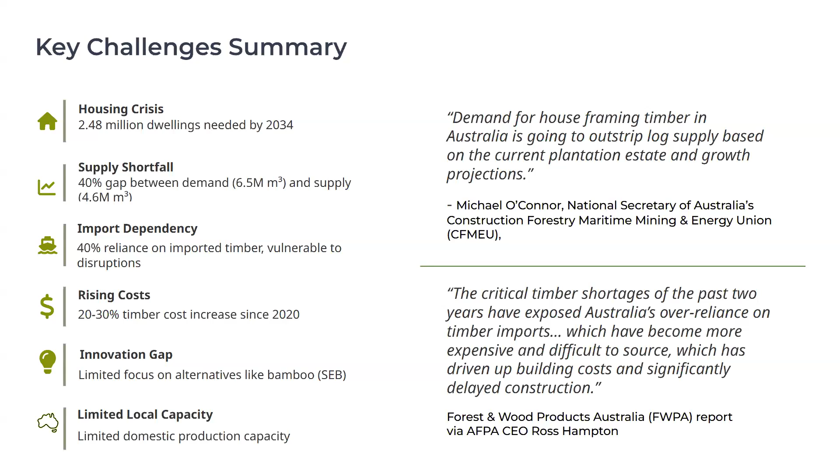On top of this, construction is responsible for over 30% of emissions and generates massive waste, 27 million tonnes a year, with most commercial furniture ending up in landfill. Buildings and infrastructure alone contribute almost a third of Australia's carbon emissions. So if materials are part of the problem, let's see how bamboo can be part of the solution.

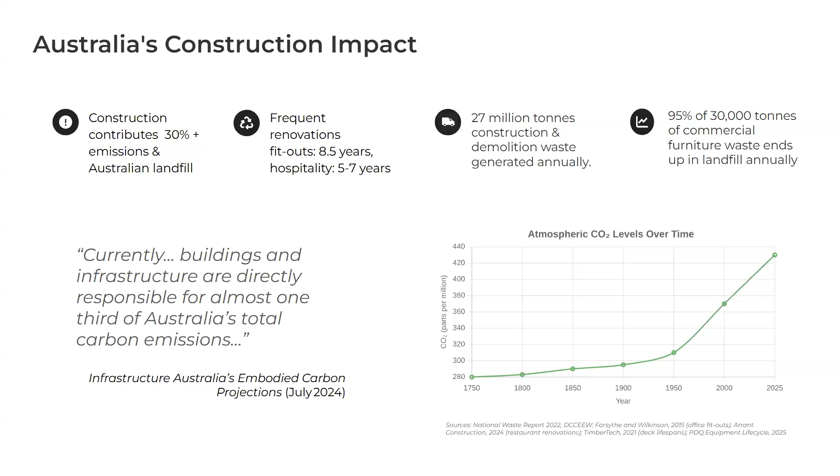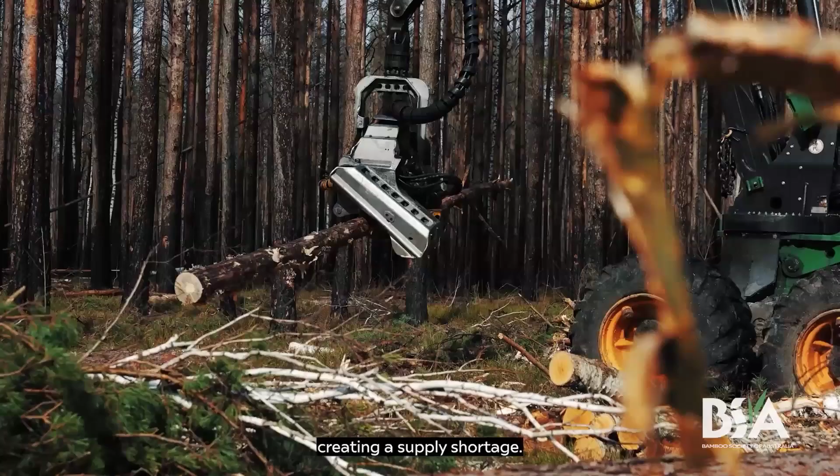Australia's agricultural and building industries face a crossroad. Demand for resources is rising while forests are decreasing, creating a supply shortage. What if the solution has been growing right under our noses for 30 million years?

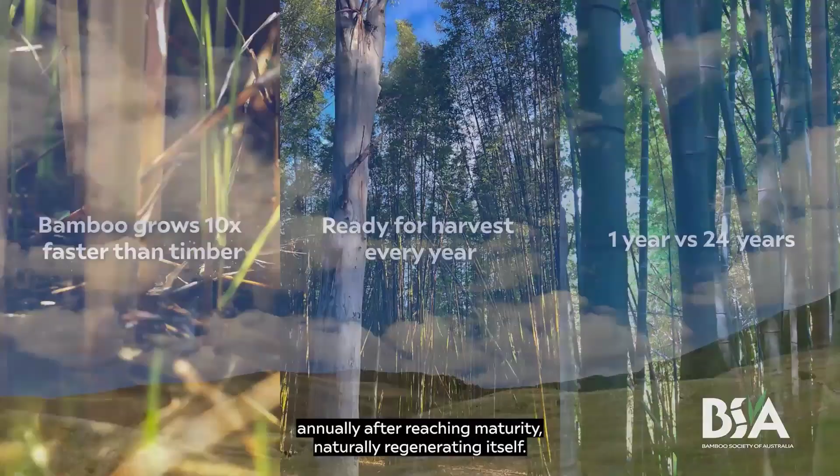Bamboo is a remarkable resource. It grows 10 times faster than timber and can be harvested annually after reaching maturity, naturally regenerating itself. In stark contrast, traditional timber demands decades to mature. With bamboo, there is a sustainable supply year after year.

This remarkable grass maximises production with minimal land use, sparing our native forests from destruction. By yielding more from smaller areas and regenerating, bamboo ensures a sustainable supply while championing environmental conservation. Bamboo plays a vital role in restoring degraded land, purifying water, and capturing carbon at levels surpassing traditional forests. It represents a valuable opportunity for environmental restoration with economic return.

Modern plantations use clumping, non-invasive varieties, harnessing Australia's native bamboo species, complementing Australia's forestry expertise, and creating new opportunities without replacing existing industries. This approach has the potential to provide sustainable energy, create resilient materials, and strengthen rural industries. With careful selection, bamboo farming can integrate into our agricultural system. Together, we can grow Australia's future with bamboo.

That was the start of our opening to the Frontier Summit across 3 cities, having remarkable speakers join us—expertise globally in terms of cross-laminated and engineered timber and bamboo, those delivering that at scale, and some familiar faces you'll see here on screen. We're very grateful for the breadth of speakers we had participate in the summit.

The summit was about exploring the opportunity, as Patty said earlier, the 10-year roadmap, the plan of what we need to do over a 10-year period across a series of phases to actually develop an industry from scratch, from foundations through to market scale, harvesting, commercialisation. We identified these key phases and 16 themes of actions to support the roadmap. The event was framed around exploring opportunities across these themes, and we broke it into 3 different areas for the different cities.

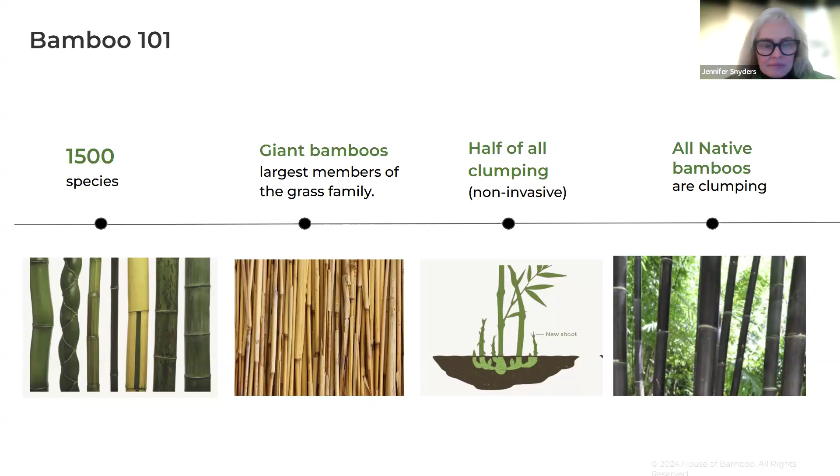That's right. Bamboo's biggest advantage is that it's the fastest growing plant, so it can reach full height in just 6 months. It then spends the next 5 to 7 years strengthening its internal structure, which is when it reaches its optimal strength for construction materials.

Unlike timber, it regenerates annually, harvested above the ground while the root system remains intact. It's not a forestry product, but an agricultural crop, more like a fruit tree, yet it performs like a hardwood. So that raises an important question: where does it fit in our current material framework?

Beyond its growth speed, its environmental impact is just as impressive. It sequesters carbon up to 4 times the rate of some trees and produces 35% more oxygen. Because only mature 5-year-old culms are harvested, about 75% of the plant remains untouched. There's no clear felling, biodiversity is preserved, and because it's cut above the ground, carbon stays stored in the soil. Each year, new shoots generate, creating a truly sustainable annual harvest.

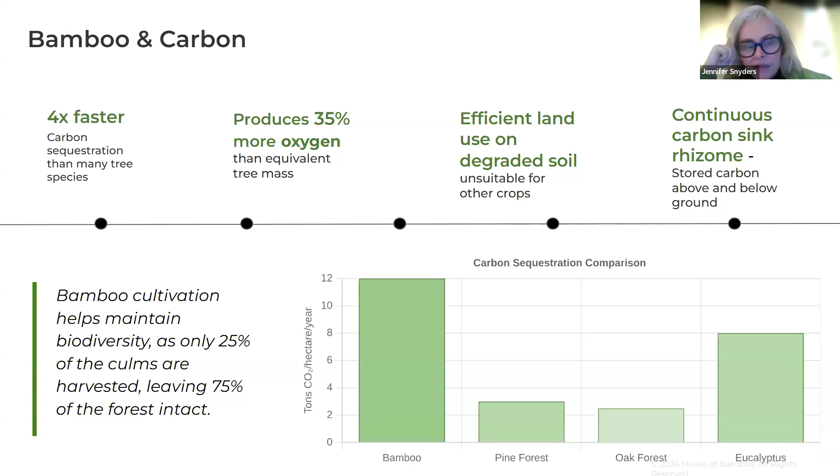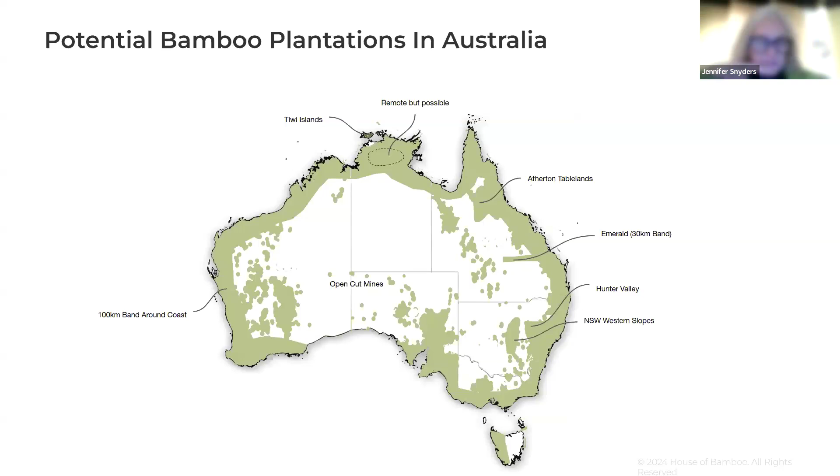If we just planted on 1% of the agricultural land in Australia, we could generate a renewable annual yield of raw material. Because bamboo regenerates each year, this is not a one-off harvest, it's ongoing. The potential is huge, with modelling suggesting up to a 40% reduction in emissions by 2060 if utilised at scale. Which leads us to the final piece: how can all the raw material be used in construction?

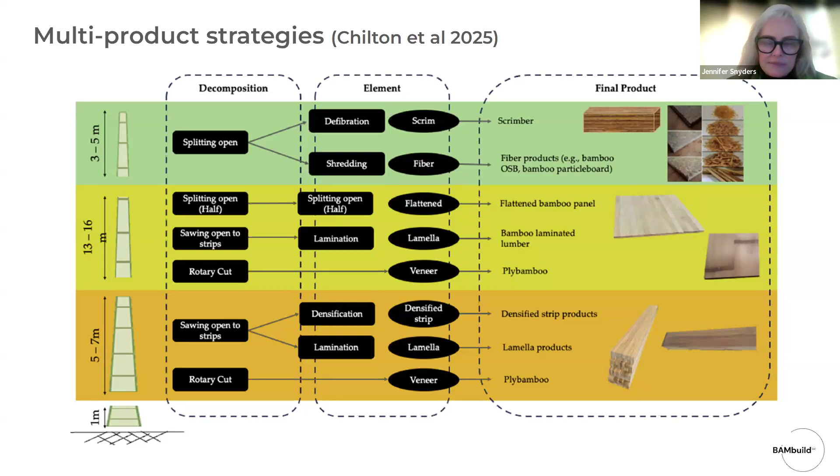With all the potential raw material, you can see from the area how we break up the poles and how we work within the different areas, and what the final product options are with regards to the bamboo. The next step is how it can be transformed into structural materials, and this is where the real impact is.

That leads us well into Sydney, talking to architects and designers about the use cases of applying it into the built environment, which many of MECLA here would be very interested in, and I'm sure there's plenty of those that might have joined us in Sydney for that particular event. We had the opportunity to explore and highlight what has already been built with bamboo and what is possible. We'll share a bit of that.

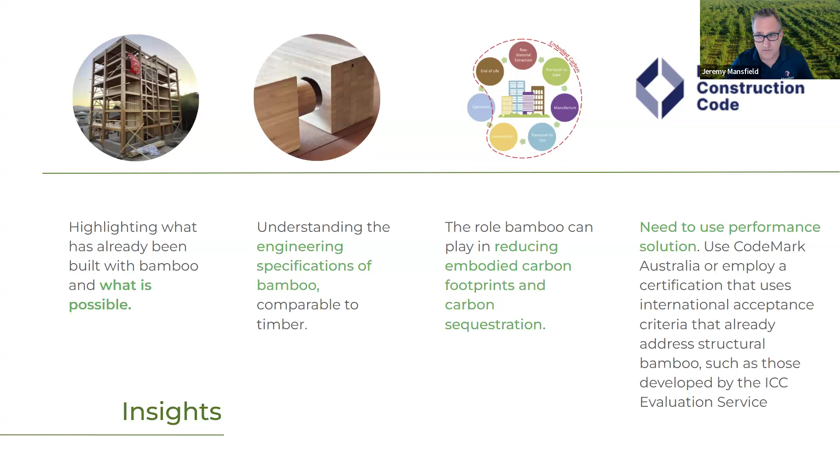Understanding the engineering specifications for bamboo and comparing to timber - we've got some results that will be shared. The role bamboo can play in reducing embodied carbon footprints and carbon sequestration - Isabella will share a bit more about her involvement with that in a minute. We also had a good conversation around the need to use performance solutions in the event that we don't have existing standards, following the pathway led by engineered timber in terms of existing standards and utilising international acceptance criteria to start implementing its utilisation.

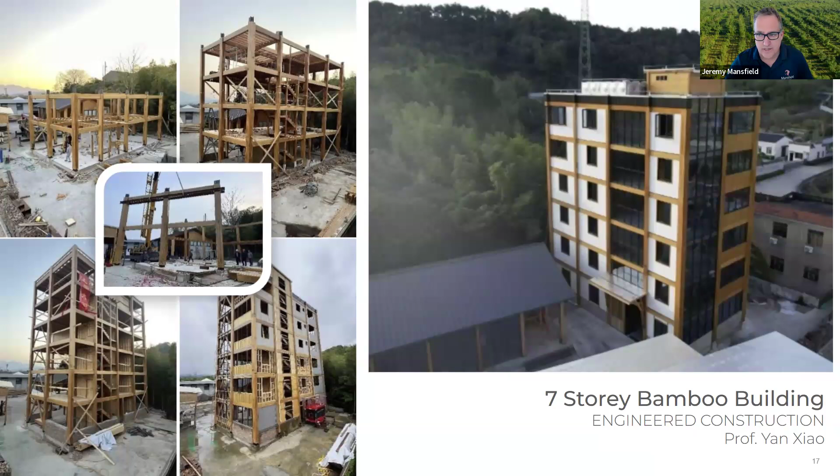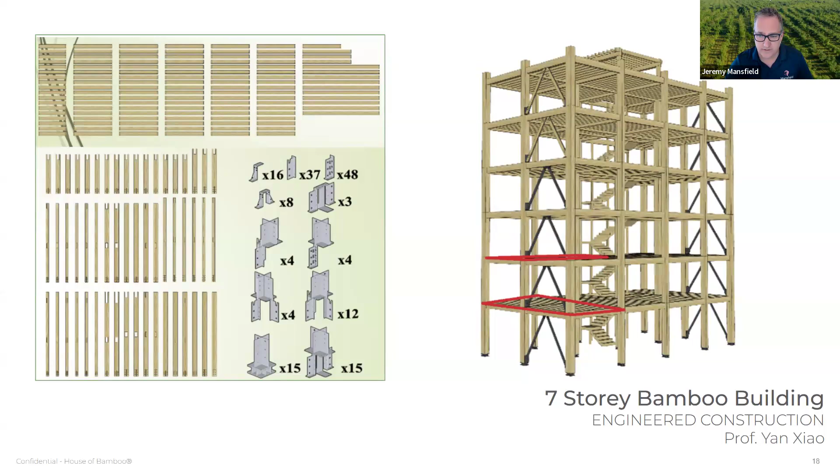We were hugely fortunate to have Professor Xiao join us from China. This is his 7-story bamboo building - yes, I said 7 stories of bamboo. It looks just like a cross-laminated engineered timber building in most parts. In fact, the floor plates on this are actually a cross-laminated bamboo and timber structure flooring system, so they are very close bed partners, timber and bamboo here.

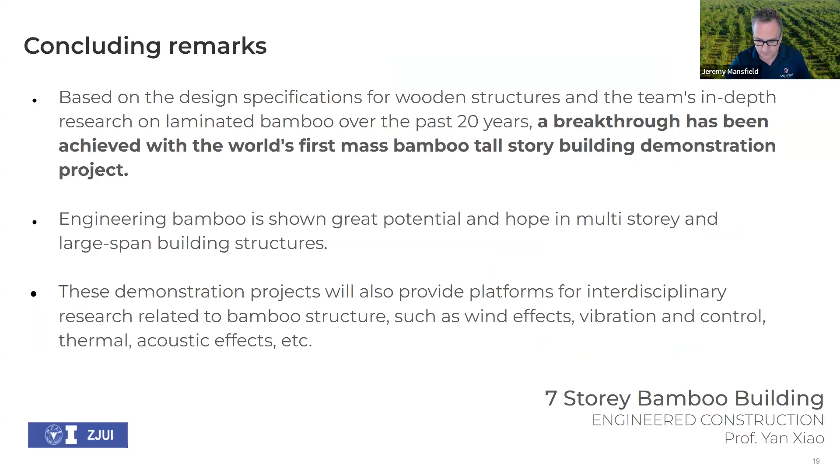We also got him to share some concluding remarks, which we thought were very astute and important to realise - that we have reached a breakthrough moment in seeing it applied in that mass-engineered bamboo demonstration project, sharing its potential and demonstrating its ability to achieve all the other attributes required of any mass-engineered building system. Very fortunate to see that.

And then I said, well, build it and they will come. So I created a showroom, building it with structural bamboo to show what's possible. That actually caught the attention of Professor Mahmood from Deakin University, who offered to test the material, which is very exciting. That was also overseen by Professor Neil Thomas from the UK.

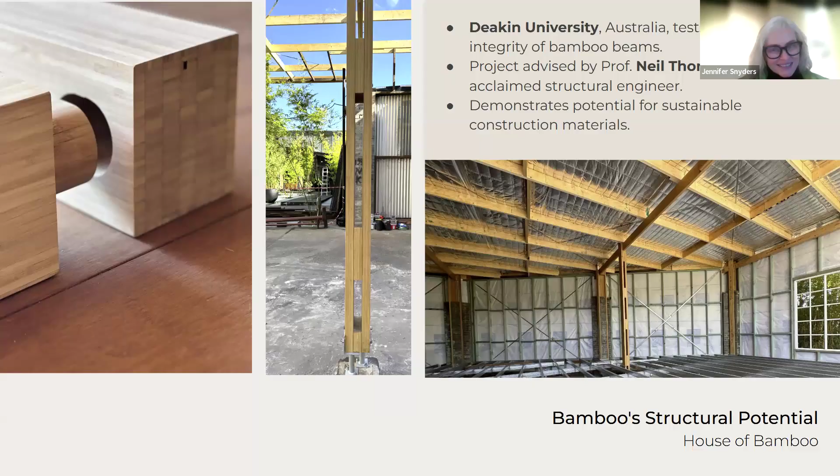They've already tested against ISO standards that exist, so it was really important to get this opportunity to generate Australian results and compare those. The exciting part is that the tests have just been completed 2 weeks ago, so we look forward to providing those results, hopefully mid-September, and then look at how to design to those.

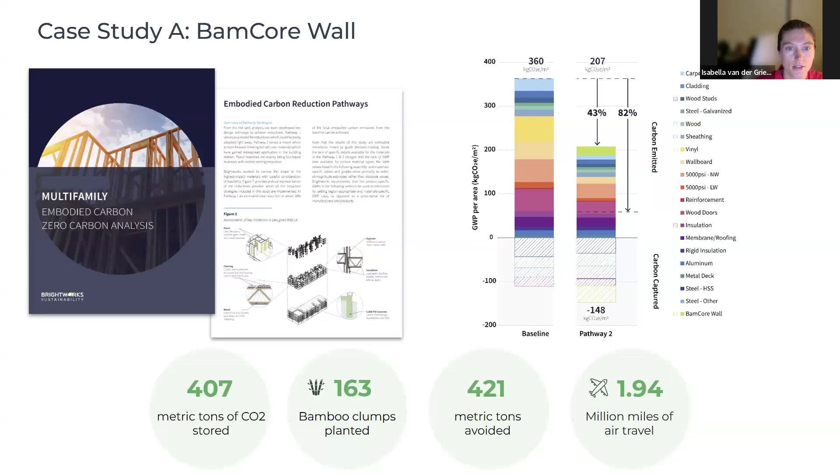But through modeling this bamboo-based system, we saw not only a large decrease in upfront emissions, but also a very significant amount of biogenic carbon stored within this type of building. So it's really exciting to start modeling how bamboo plays a role in decarbonizing a typical structure.

Next slide, please. So when we compare bamboo's embodied carbon to other materials, we can see that bamboo has really large biogenic carbon storage because, as Jennifer was saying, it grows much faster, and with its higher density, it locks away a lot more carbon per cubic meter. But some engineered products can be higher in terms of fossil emissions because they take more processing energy and some adhesives, which can also increase embodied carbon.

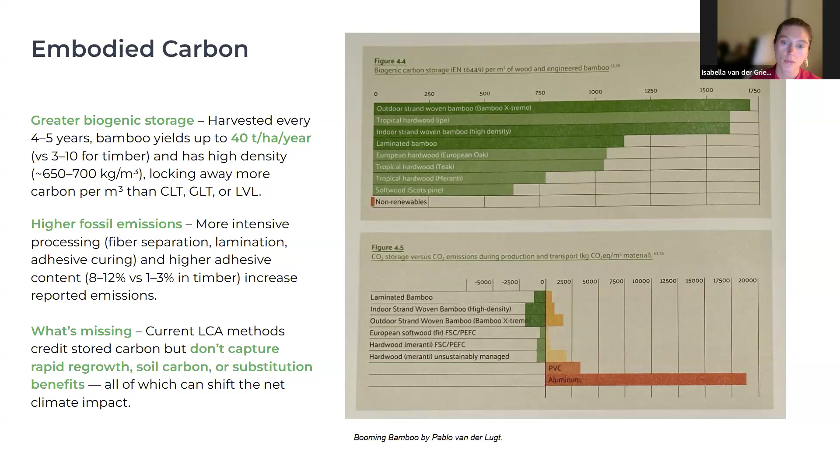But what I really want to speak to is what's missing in our current LCA models: we aren't properly accounting for the rapid regrowth rate and other sustainability benefits of bamboo that Jennifer spoke about earlier. So I'll talk about that in my next slide.

This brings me to some methods in carbon accounting. Today's practice, following current standards—typically ISO and EN standards—is what we call static LCA. For every unit of carbon sequestered during the plant's growth, there is an equal amount of carbon emitted back into the atmosphere at the end of the building's or material's life. So this is essentially assuming carbon neutrality over the full life cycle.

And it's ignoring a really key component here, which is the timing. It's not reflecting the rotation periods of different bio-based materials or their speed of regrowth. That's a key differentiator between materials like timber versus bamboo and straw, which have much faster regrowth rates.

So in order to account for this, dynamic LCAs are becoming more common. The objective there is to consider the timing component. By adding that dimension, we show the fast regrowth rate that bamboo has. That regrowth rate of 4 to 5 years means we can achieve a net cooling impact much faster than with other carbon-emitting materials or longer-harvesting timbers. This is really important when we're talking about meeting our climate goals and the urgency around that timing component.

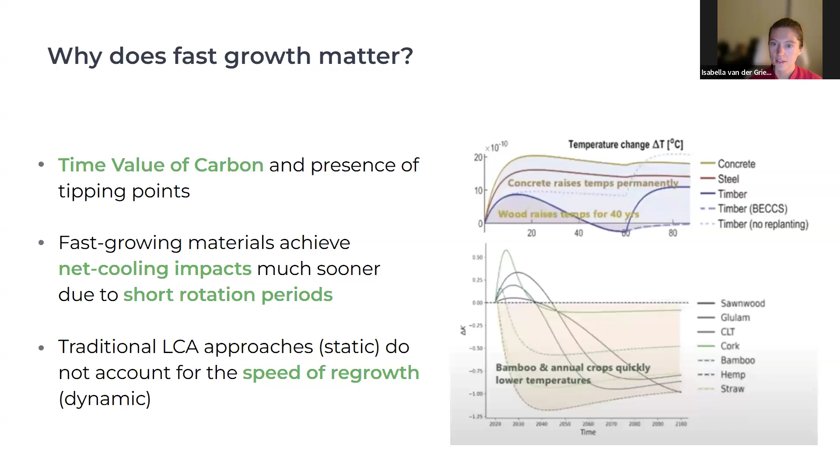Yeah, so I'll hand it back over.

You're on mute. I'm near the airport, trying to save you the airplane noises.

Here's some examples of engineered bamboo applications here in Australia. This is all about curves—engineered bamboo in the Marvel Stadium.

This was completed last year. All the components were about 167 battens, all prefabricated and brought to site, and it was a seamless installation. And doesn't it look beautiful? Bamboo and curves. Next one.

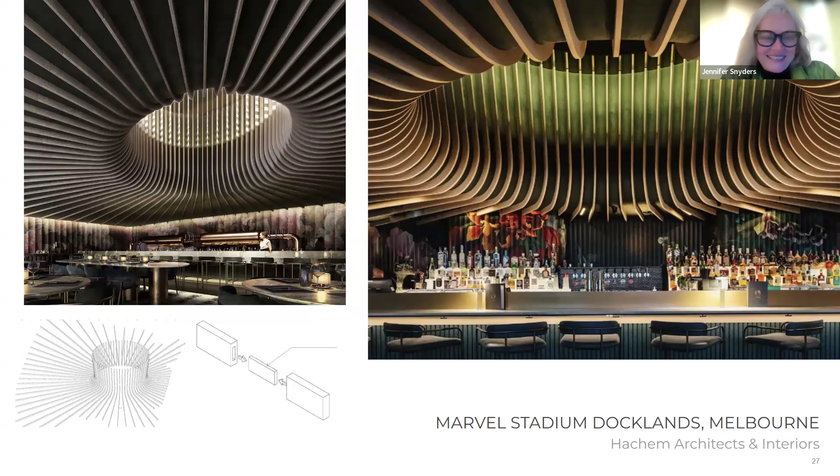This was what MECLA also referred to—we had an open day there with MECLA about a month ago. This was with Hassell Studio, all that bamboo working so beautifully with all that timber. Aren't they nice partners? This was a wonderful project.

It was all external battens that we used. We prefabricated the whole system, and it was attached to the glazing—we worked with the glazers—and that was all brought in pre-made, then assembled on site seamlessly, might I add.

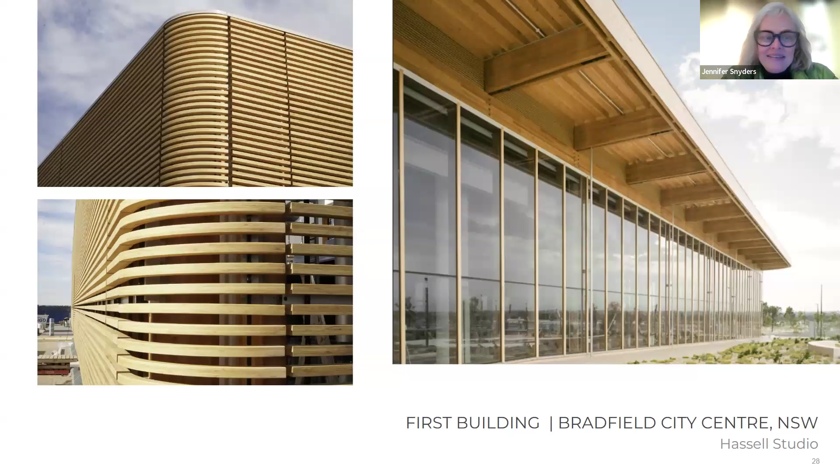And interestingly, next slide—oh sorry, okay. This was pre-made panels for a ceiling fit-out for Chatswood Chase. Each individual panel was unique, so not one panel was the same. That was pre-assembled and then delivered on site, and I think it was a 3-day installation.

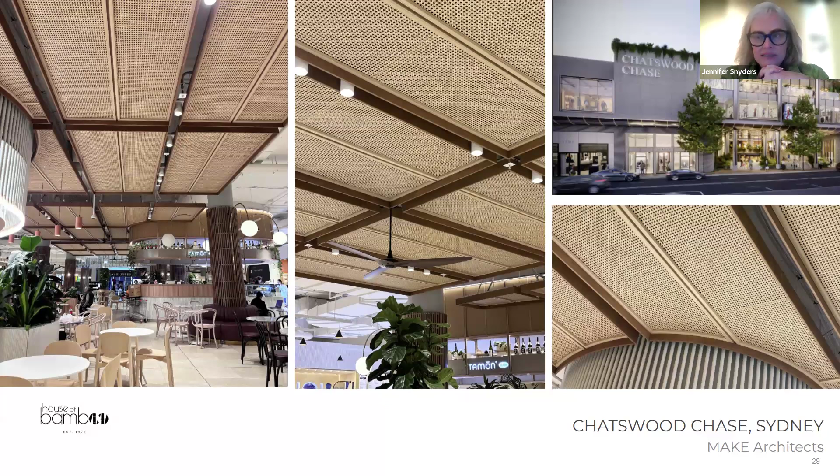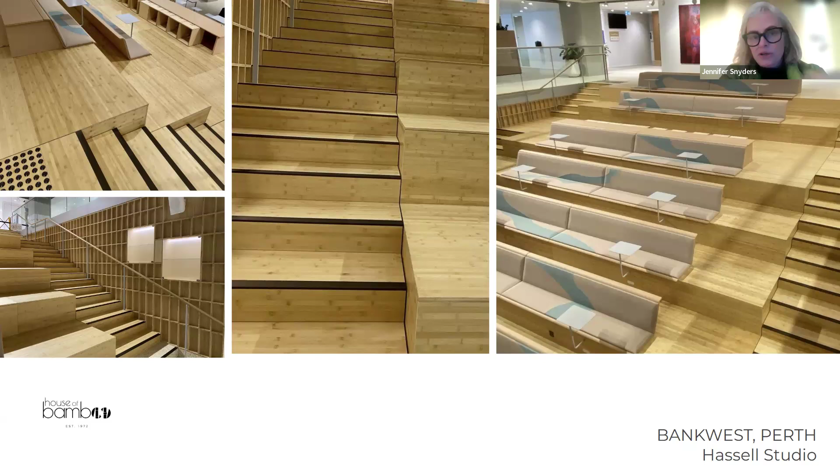Bamboo ply used for cabinetry, joinery items and flooring in this case, and Hassell actually wanted to accentuate the fact that it was bamboo, and therefore we used a construction whereby the nodes are quite clearly seen in the visuals of the material.

Through that Sydney session, we determined that there are great examples of a breakthrough moment, a demonstration of real-world outcomes from an innovation perspective, that its performance characteristics meet or exceed existing materials in the space, and that there are methodologies through performance-based solutions, following the path of cross-laminated timber in terms of that early stage performance-based approach until it got to a DTS deemed to satisfy standard over a decade.

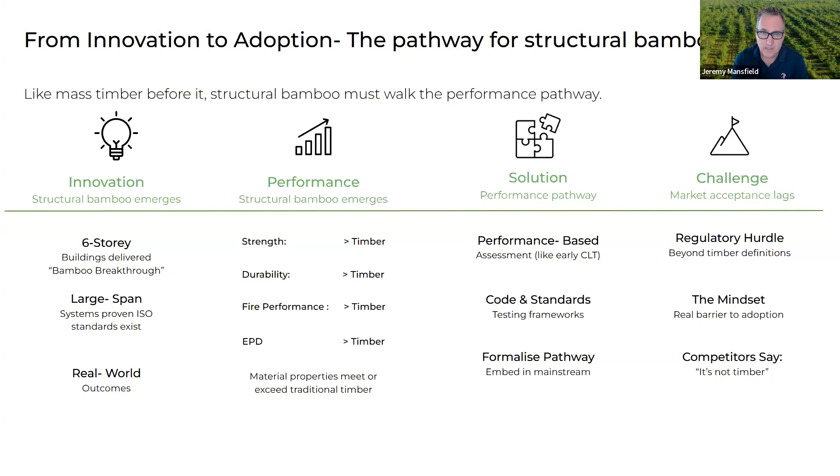There are existing international standards and ISO frameworks to work with and help co-design to utilize here in Australia. But we still have some challenges around mindset and definitional hurdles around regulatory definitions, and also identifying the fact that it's a grass not necessarily known to be a structural performing material. So that's really the summary of some of the discussions in Sydney.

And then we moved to Melbourne, focusing on some of the investment and policy issues, as well as sharing a few other demonstrations of international things that are occurring.

Part of that was demonstrating one of our partners in the summit, Rhizome and David Sands, who shared their global experiences, highlighting that Fortune 500 companies are getting involved, identifying early planting and getting going to support that has really helped them start to scale up. Increasingly, investors are looking at carbon sequestration and biodiversity benefits for large-scale projects in both developing and developed countries, i.e. Philippines and Florida in the USA.

Then it was important, I thought, to share scaling up and what is feasible and possible. So this is our factory in China where we produce the materials.

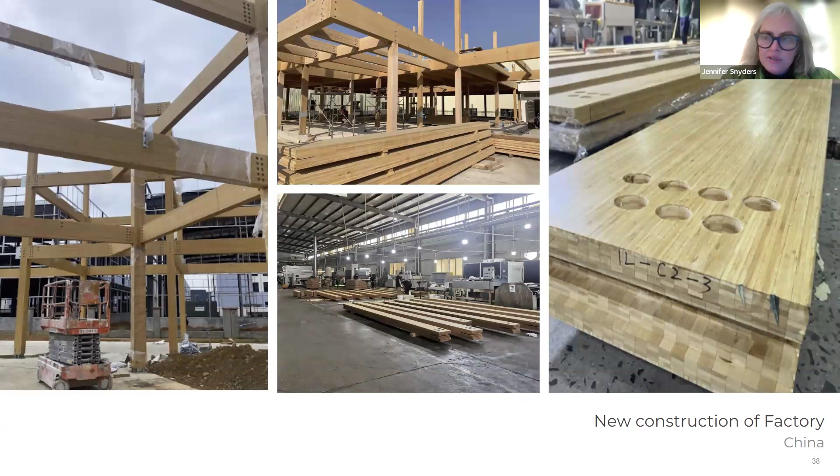We repurposed a lot of it, but a lot of it was prefabricated, engineered bamboo, as you can see the elements there, and photos of the factory and the type of materials we're producing.

So the capacity, to give some indication, is we can produce around 10,000 cubic metres of engineered bamboo per month. I think currently we do about 40 to 50,000 cubic metres of CLT in Australia per year.

Lengths up to 16 metres can be achieved, and you can see the different widths and dimensions. Durability class 1, thermally modified, anti-mold treatments exist, fire retardant exists. We do lots of work around the standards, and R&D is always an ongoing concern as what we work towards.

So from this factory, I'd like to share some of the projects that have been built with engineered bamboo, so you can see the possibilities of what we hope to be doing in Australia shortly.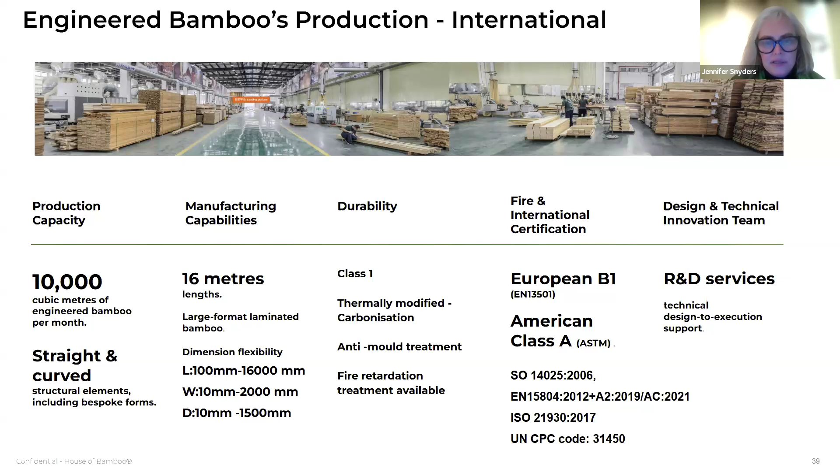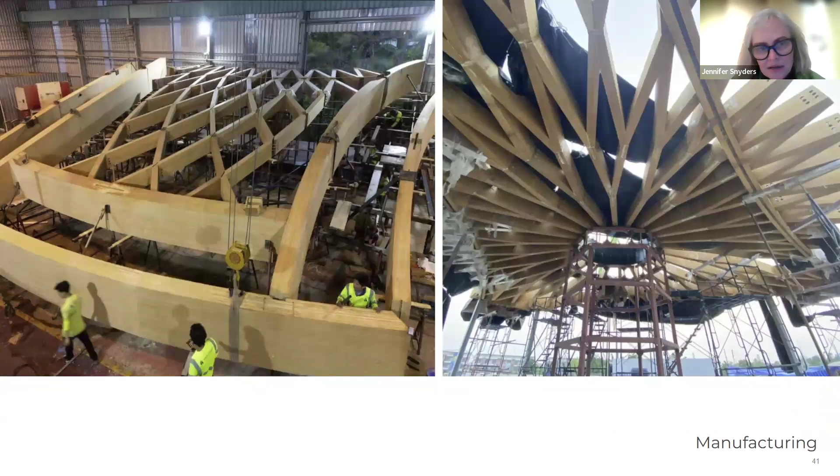This was Foster and Allen Six Senses Resort. There's 200 cubic metres of bamboo used, and just to show you the factory making the pieces - that's the size of those elements you can see with the people. So that's quite impressive, I thought.

This was Shanghai Library. This is actually bamboo battens as well as bamboo veneers over aluminium posts because it needed to meet a fire regulation for this particular building, and so that was how it was achieved.

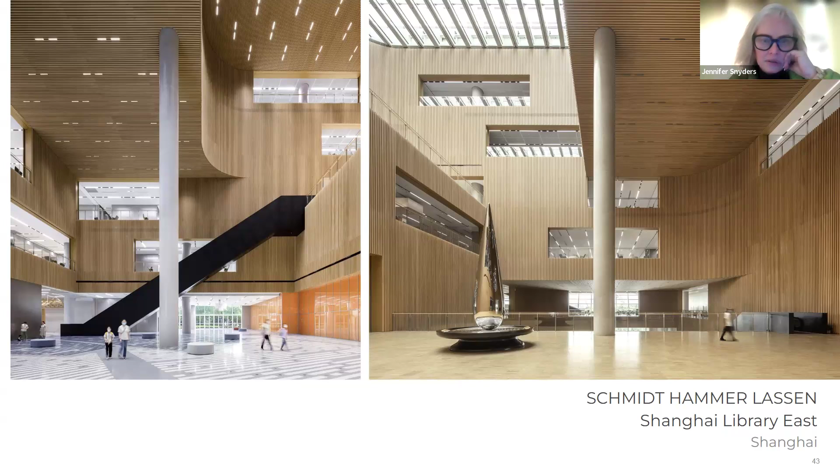Rayon Airport - similar to the Madrid airport that was one of the first commercial bamboo works. Ceiling panels, acoustic panel clip systems. Cuiping Mountain, engineered bamboo, about 500 cubic metres, all externally used. It's mould treated and performs really well.

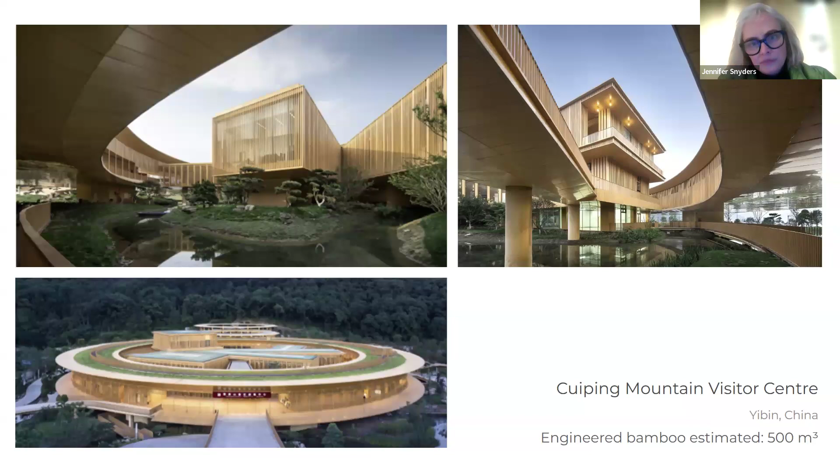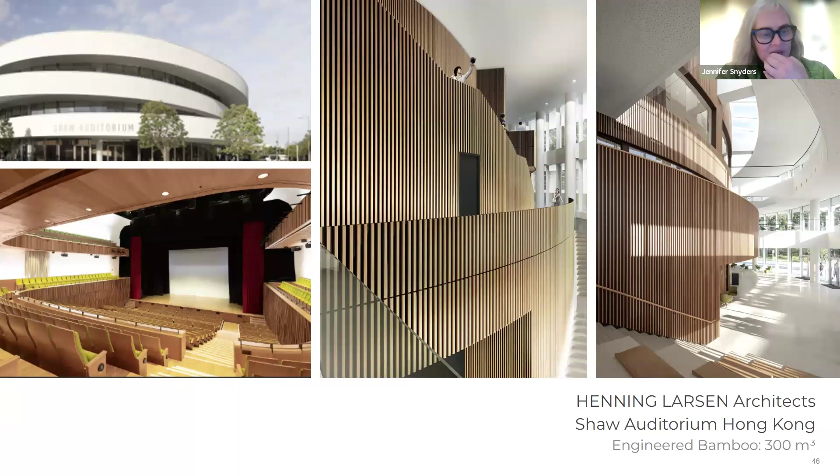Shaw Auditorium - this is all bamboo, the entire project, including the auditorium and the acoustic panels, and it won an environmental award as well. And then we've got M+ Museum - I love this project, so if you ever get to Hong Kong, please check it out. There's a huge amount of bamboo used here, from flooring to cabinetry to some of the structural beams. It's a great testament of what's possible.

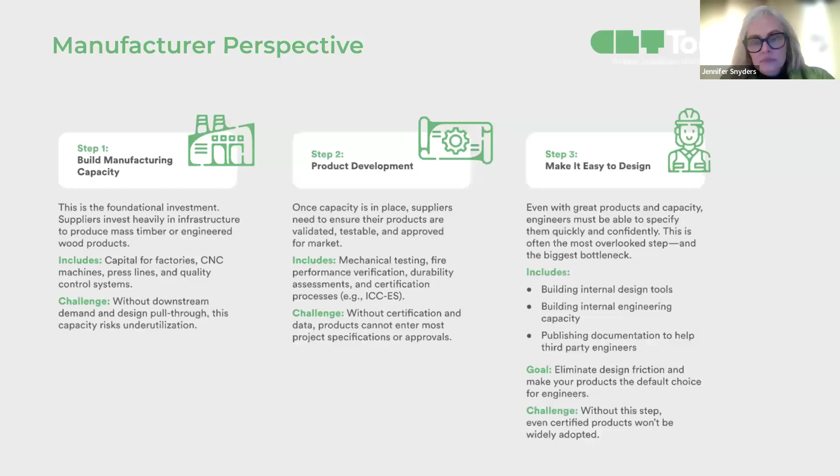We were also joined by Adam Jones from CLT Toolbox, providing lessons learnt in what he's been doing as a startup to support the cross-laminated timber industry, reflecting on building manufacturing capacity and identifying underutilisation risks. We flagged the opportunities to work with the timber industry's manufacturing capacity to support greater productivity. Equally, product development and products that have evidence of certification and meeting international standards are key and critical to help provide confidence around suitability for application.

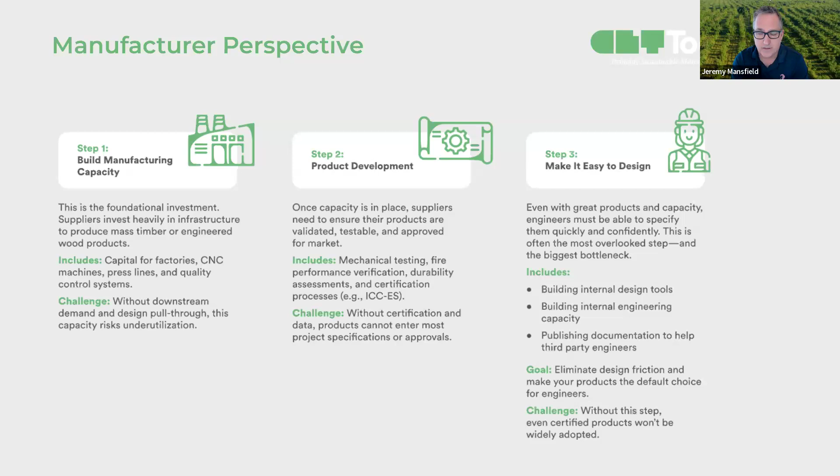Lastly, acknowledging that making it easy to design is a real key issue - if you haven't got that right, you might not get application of engineered bamboo products. Recognising that even just having certified products is one thing, making it accessible and easy to utilise in design processes is an important factor. He gave great insights highlighting how important it is to put the tools in the hands of those who design, integrating bamboo specifications within his toolbox alongside other engineered timber products to help support its utilisation.